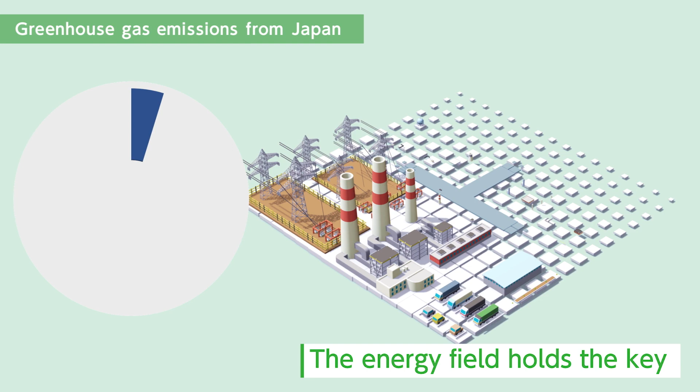The key to realizing a carbon-neutral society in Japan by 2050 is the reduction of carbon emissions in the energy field. To reach this goal, the Japanese gas industry has been developing e-methane, a new type of gas synthesized from hydrogen and carbon dioxide, or CO2.

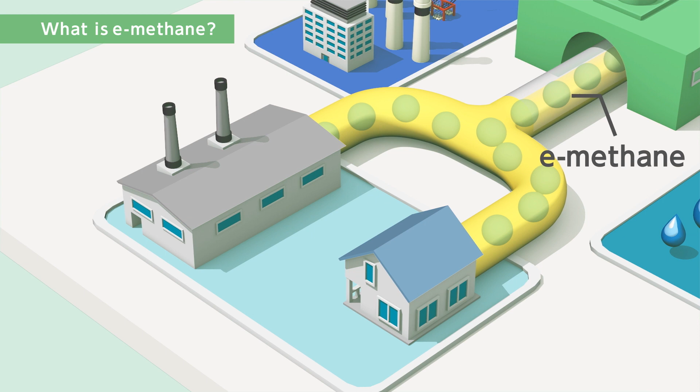E-methane is carbon neutral because its production captures the same amount of CO2 as its consumption emits into the atmosphere, thereby causing no increase in CO2 on the Earth. E-methane is also an economical solution to energy transition for society and consumers because it can be distributed and used in the existing gas pipelines and appliances without replacement or modification.

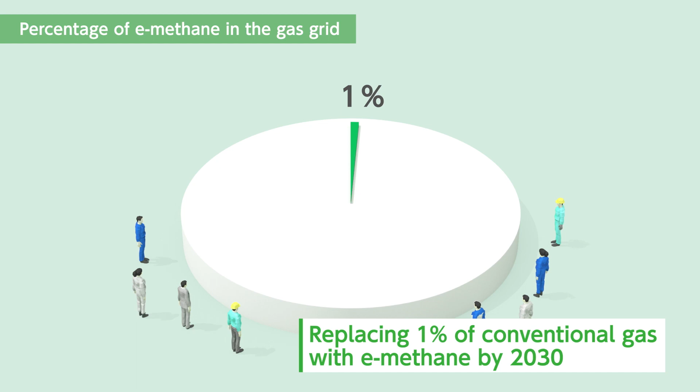With this synthetic methane, the Japanese gas industry aims to replace 1% of conventional gas in the network by 2030 and 90% by 2050. To meet these targets, the industry has been advancing the technologies of methanation, a chemical process to produce e-methane, to the commercial level in the near future.

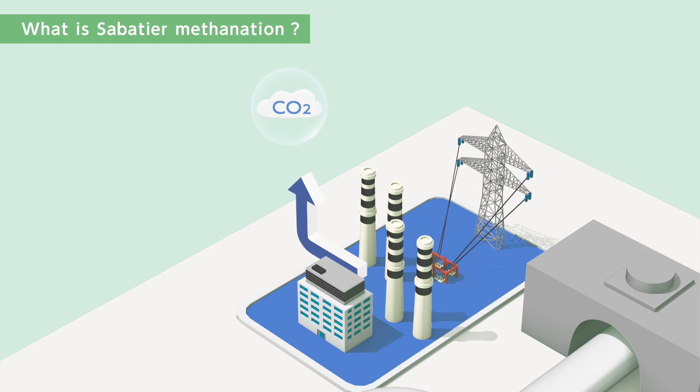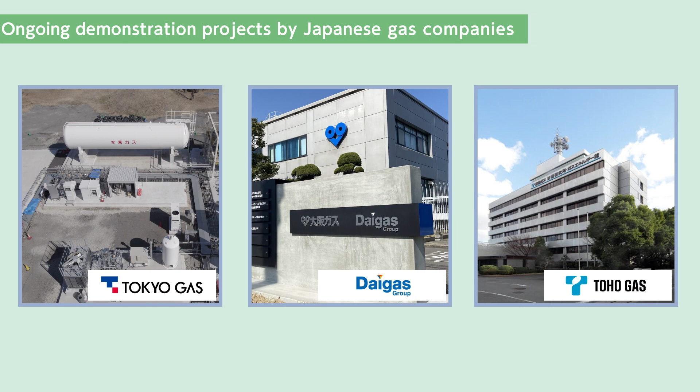Sabatier methanation is an existing technology-based method expected to be central in achieving the 1% e-methane target for 2030. This method combines captured CO2 from factories and other facilities with green hydrogen to produce e-methane. Japanese gas companies are working on demonstration tests on Sabatier methanation.

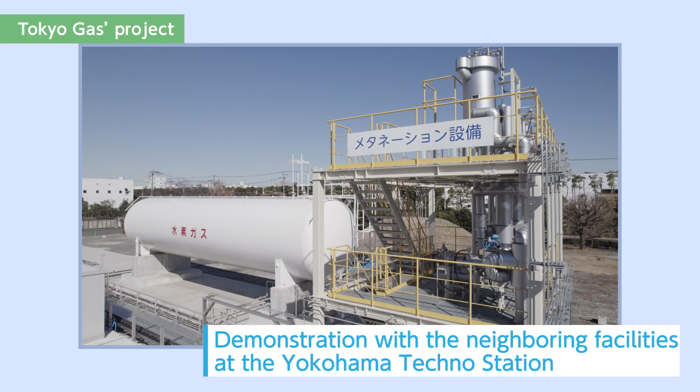Tokyo Gas has started a project at the Yokohama Techno Station using CO2 and recycled water from a nearby waste processing plant and sewage treatment plant to produce e-methane through Sabatier methanation and achieve net zero emissions through community-wide cooperation.

Meanwhile, Osaka Gas plans with INPEX to conduct a demonstration test in Nagaoka City, Niigata Prefecture. The two companies will demonstrate Sabatier methanation at the world's largest scale to produce e-methane enough to meet the gas demand of 10,000 households.

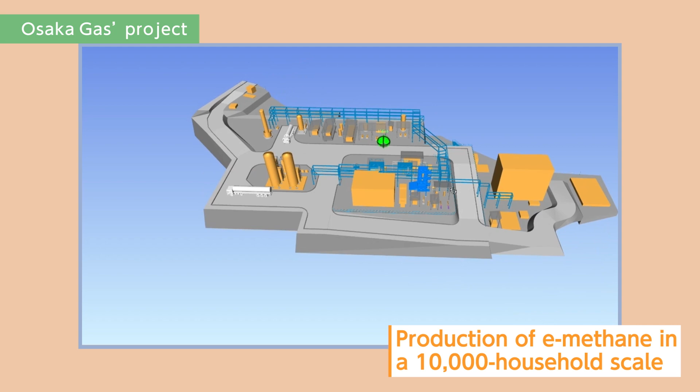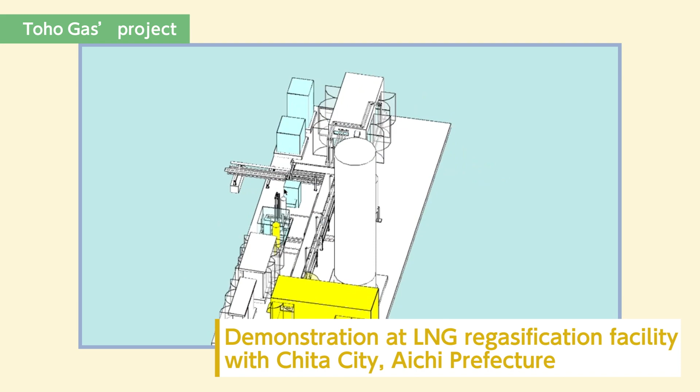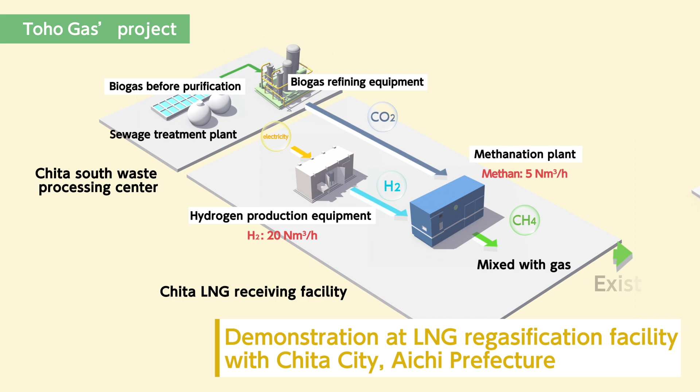In Aichi Prefecture, Toho Gas is working with Chita City on a project to produce e-methane through Sabatier methanation at the existing LNG regasification facility using CO2 recovered from a nearby sewage treatment plant to supply e-methane to customers through the existing gas pipelines.

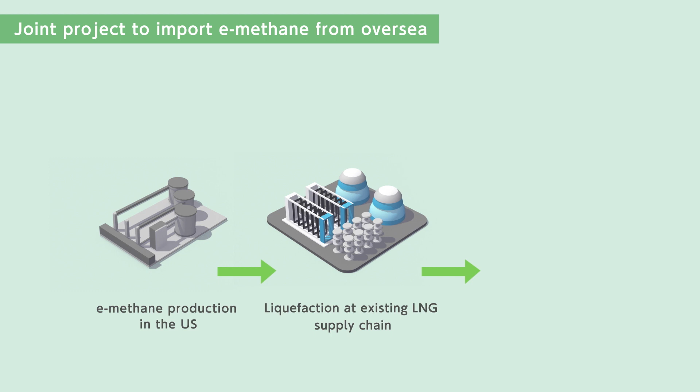As a joint project to import e-methane from overseas, Tokyo Gas, Osaka Gas, Toho Gas, and Mitsubishi Corporation collaborate to produce e-methane in the US and liquefy it using an existing LNG supply chain to transport it to Japan. The project aims for an e-methane import volume of 130,000 tons per year, expected to contribute to the e-methane introduction to Japan.

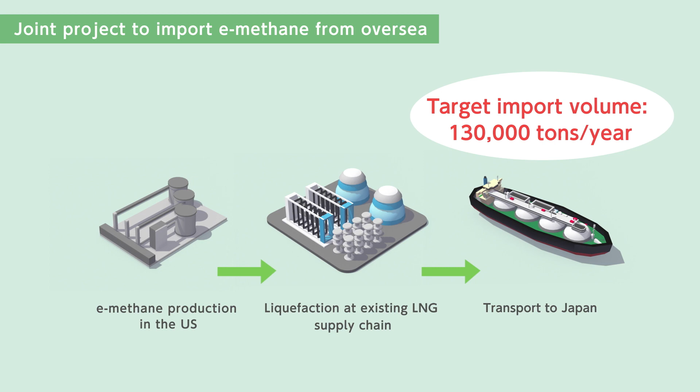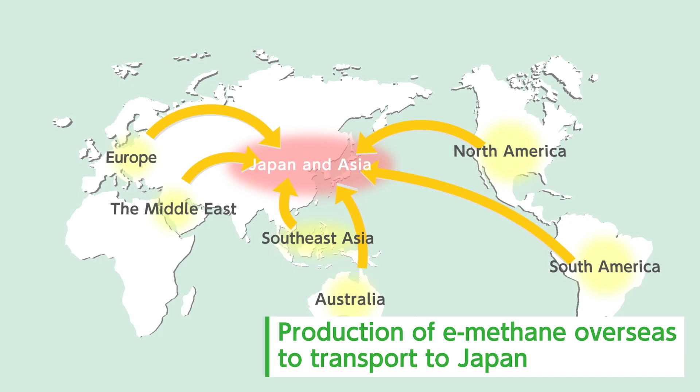Various other projects are in progress overseas to produce e-methane in areas with access to abundant renewable energy sources, such as North America and Australia, to transport to Japan and other Asian countries. Besides Sabatier methanation, Japanese gas companies are working on innovative methanation projects to produce e-methane directly from water and CO2 to achieve higher efficiency and lower cost.

Those projects have been recognized as critical for the country's energy future and receive support from the Japanese government's Green Innovation Fund. To promote the development of innovative methanation, Tokyo Gas and Osaka Gas have launched a joint committee where they collaborate to resolve challenges in methanation projects. Let's look at 4 projects accelerating the innovative methanation technology development.

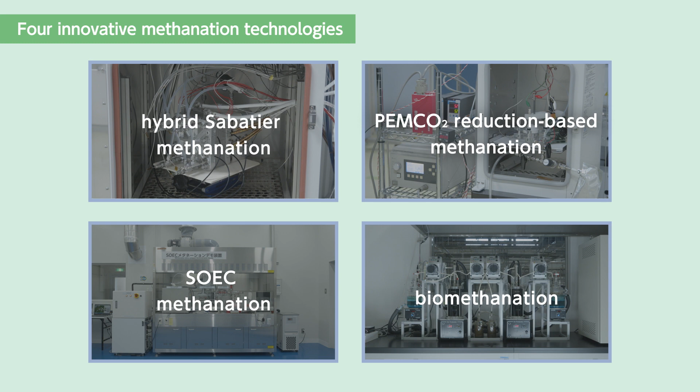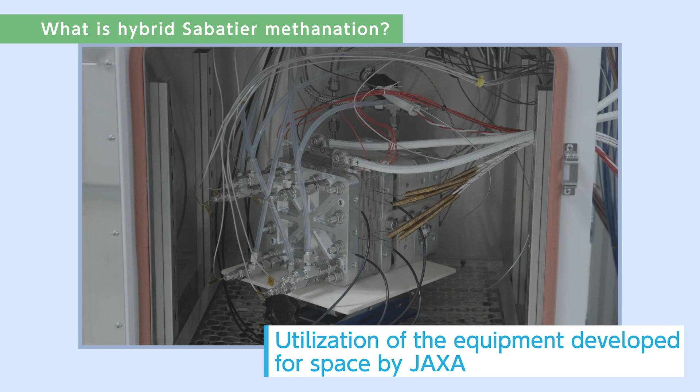Tokyo Gas is working with JAXA, the Japan Aerospace Exploration Agency, on hybrid Sabatier methanation using the equipment initially developed for use in space to produce e-methane and hydrogen. The project aims to increase energy conversion efficiency and reduce the cost by utilizing the heat generated from the e-methane synthesis to produce hydrogen.

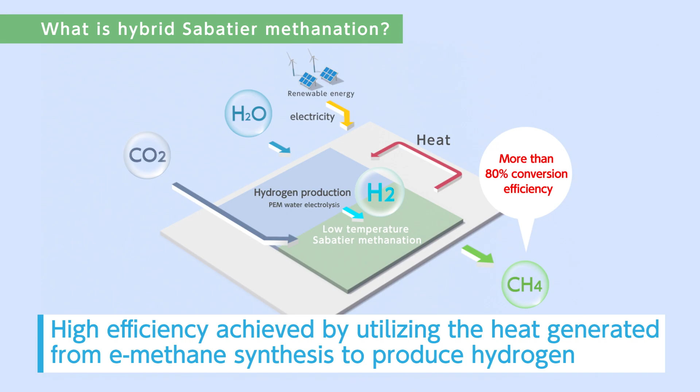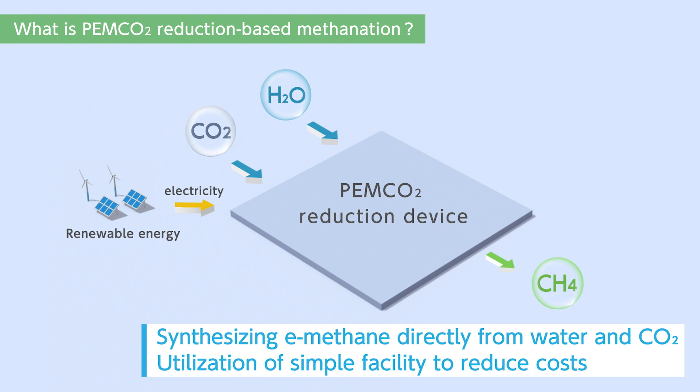In another project, Tokyo Gas is developing a methanation technology based on PEM CO2 reduction, a method to synthesize e-methane directly from water and CO2 using a polymer electrolyte membrane, which is also used in fuel cells. This method can produce e-methane at a simplified facility, offering the potential for further cost reduction.

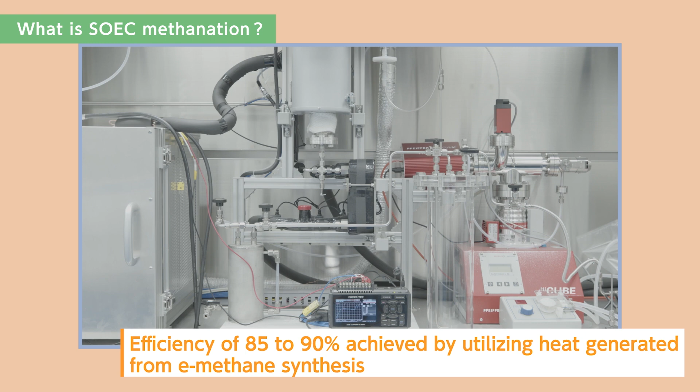Osaka Gas focuses its e-methane efforts on developing SOEC methanation technology, leveraging its proprietary solid oxide electrolysis cells. This technology can save electricity and minimize energy loss by utilizing the heat generated from the e-methane synthesis. With this technology, the company aims to achieve the world's highest energy conversion efficiency of 85 to 90% to drastically reduce the e-methane production cost.

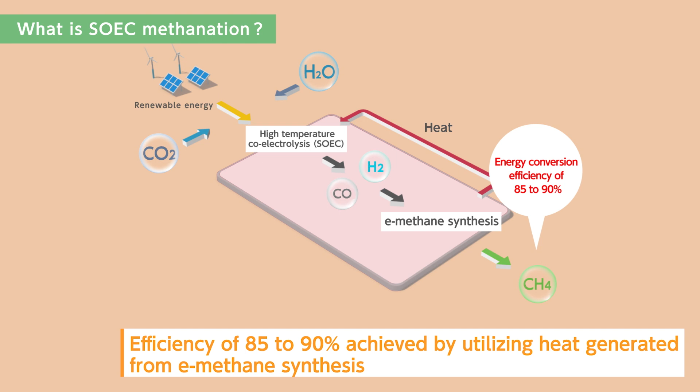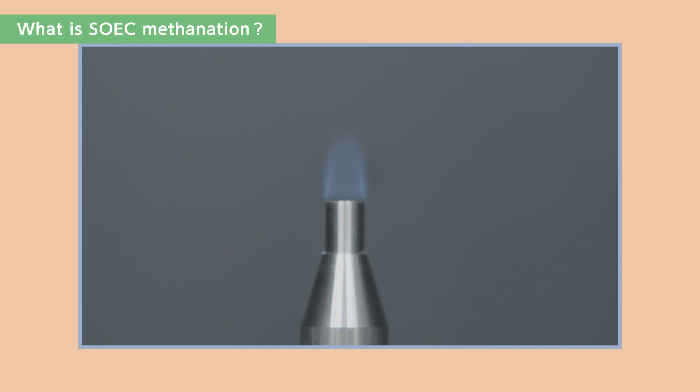Osaka Gas is working on scaling up the technology from a small-scale demo with a single SOEC plate to commercialization in 2040 to produce sustainable energy at scale for a carbon-neutral society. Biomethanation is an e-methane production method that utilizes the power of a microorganism called methanogen. In this method developed by Tokyo Gas and Osaka Gas, methanogens synthesize methane from CO2 and hydrogen through their vital activity.

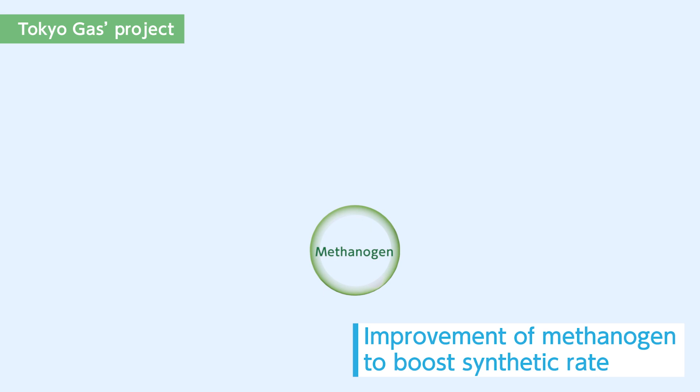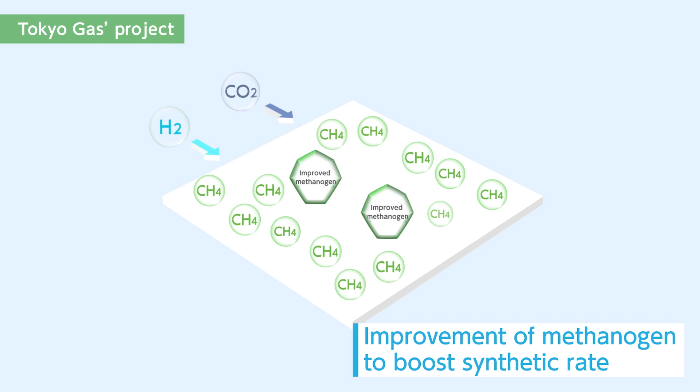Tokyo Gas is working to improve the performance of methanogens using AI-identified enzymes that promote e-methane production to boost the synthetic rate of biomethanation. Osaka Gas is conducting a biomethanation experiment using sewage sludge at the Ebie sewage treatment plant in Osaka City.

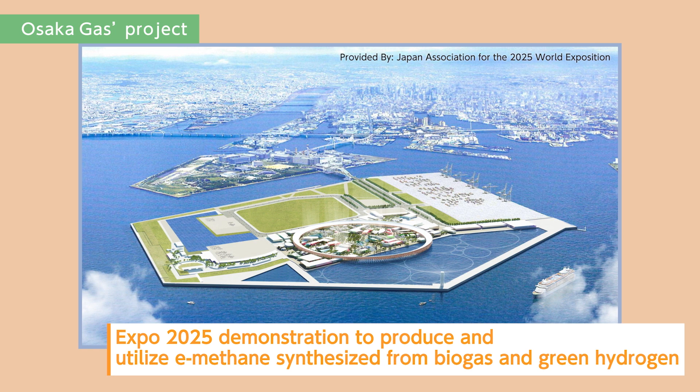In addition, the company is preparing a demonstration for Expo 2025 Osaka, Kansai, Japan, to produce e-methane from green hydrogen and kitchen waste-derived biogas for use in the guest house kitchens of the Expo site.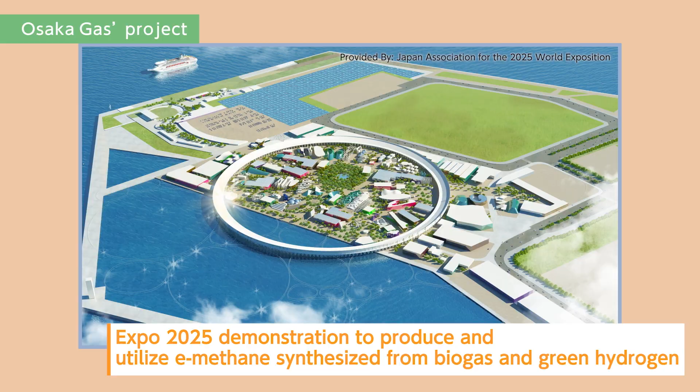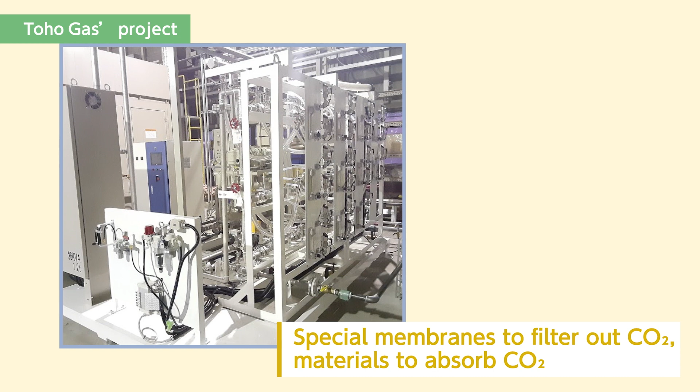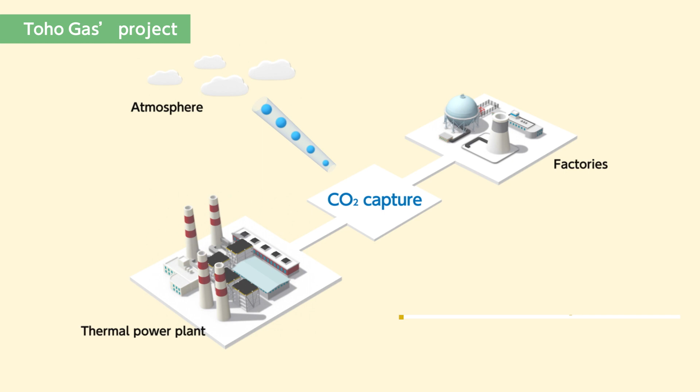Japanese gas companies also devote energy to developing underlying technologies and measures to promote methanation. Toho Gas is striving to lower the cost of CO2 capture by using special membranes to filter out CO2 and materials to absorb CO2. The company is also developing a system to efficiently capture CO2 from the atmosphere and factories utilizing energy that has so far been untapped.

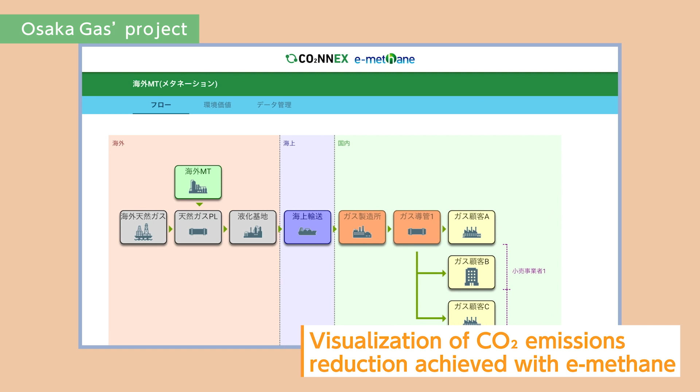Osaka Gas is building a digital platform to visualize and trade e-methane's environmental value in CO2 emissions reduction. The company is developing the platform as it continues exchanging views with the Japan Gas Association and other relevant organizations. Various preparations are underway for the practical application of e-methane, a new type of gaseous energy.

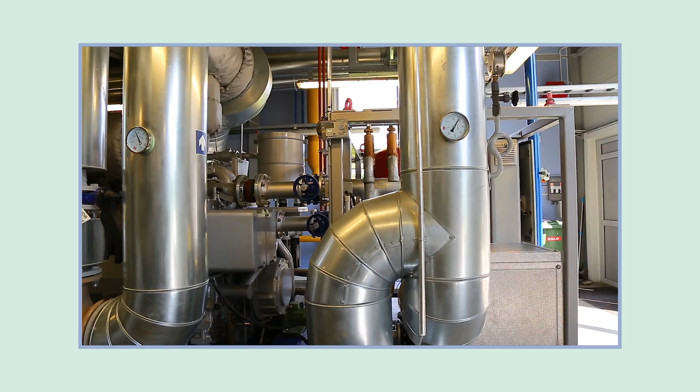E-methane is an effective solution to achieving net zero emissions without burdening society or consumers because of its compatibility with existing gas infrastructure and appliances. The Japanese government's Green Transformation Implementation Council views methanation as a promising technology for decarbonizing fuel, and the Japanese government supports companies' initiatives to accelerate e-methane's practical application for wide use in society.

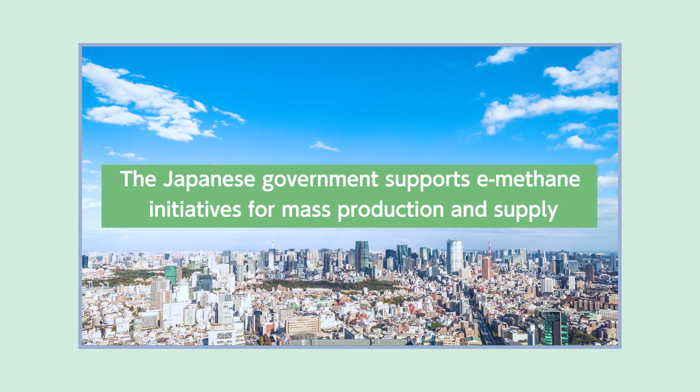In November 2022, the Japanese gas industry gave momentum to promoting their initiatives by introducing e-methane as the common name for synthetic gas produced through methanation. Japanese gas companies are united to achieve a carbon-neutral society by introducing e-methane while ensuring a stable energy supply for people's comfortable living. We are striving to meet your expectations of a sustainable future with gas.